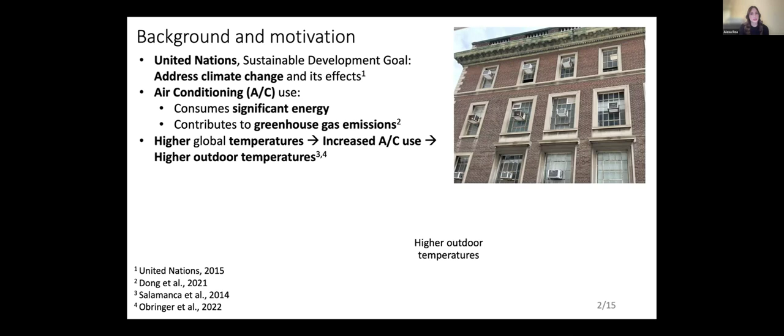One of the United Nations Sustainable Development Goals is to address climate change and its effects. Specifically, air conditioning use consumes significant energy while contributing to greenhouse gas emissions due to widely used refrigerants. In a vicious cycle, higher global temperatures lead to an increase in AC use, which in turn heats the outdoors, further necessitating AC use. Therefore, the growing environmental harms associated with increased AC use motivated us to explore how to decrease its use.

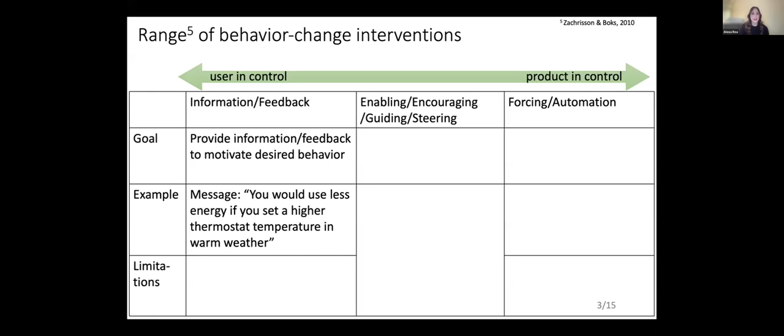Next, I'll give a background on the range of behavior change interventions. At one end of the range, user in control, we have information and feedback-based interventions. And the goal of these types of interventions is to provide information and feedback to motivate a desired behavior. And an example of this type of intervention would be a thermostat with the message displaying, you would use less energy if you set a higher thermostat temperature in warm weather. However, one of the limitations of these types of interventions is that it requires a high level of user motivation and assumes that humans are rational agents who are capable of changing their beliefs and behavior in light of new information and feedback.

At the other end of the range, we have product in control, so forcing and automation-based interventions. And the goal of these types of interventions is to make it impossible to avoid the desired behavior. So an example of these types of interventions would be setting a hard limit on the lowest possible thermostat temperature. And one of the limitations of these types of interventions is that it overrides user control. So it's making a decision on behalf of the user, and the user is not actually engaging in any meaningful behavior change.

In the middle of the range, we have enabling, encouraging, guiding, and steering interventions. And the goal of these types of interventions is to alter external factors such as the physical environment or product characteristics to motivate a desired behavior. And it was the goal of the current work to examine the effect of these types of interventions on users' thermostat temperature selections.

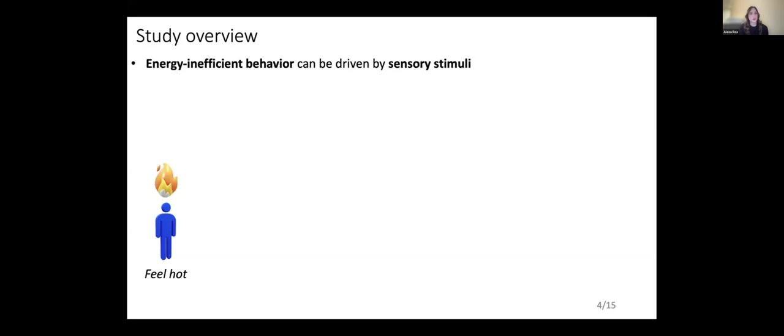Next, I'll give an overview of the study. Energy inefficient behavior can be driven by sensory stimuli. So for example, a user who feels hot entering a warm thermal environment may set an energy inefficient temperature adjustment. So we wanted to explore whether product features could create sensory stimuli that would then affect the temperature adjustment behaviors.

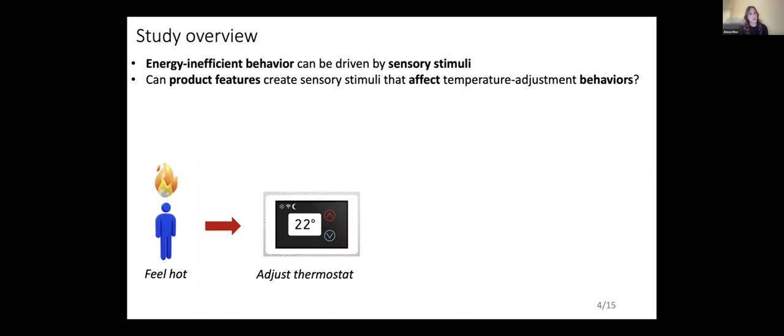Specifically, we wanted to examine how the addition of mechanical fans, which of course use less energy than AC, could increase eco behaviors. And it's important to note that the features should consume less energy than the energy the intervention intends to conserve. So we hypothesized that by alleviating thermal discomfort through the addition of mechanical fans, we could prompt more energy efficient temperature adjustments during user thermostat interaction.

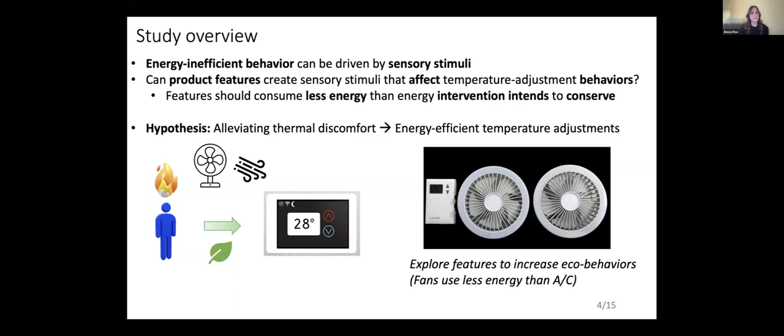So our study combined two effects. The first was fan feel, so whether participants could feel the fan or not, and fan visibility, high versus low. And we had 4 combinations of these effects. So the first was feel fan high visibility. So here in this first condition, the fans were on and were in front of a clear cover.

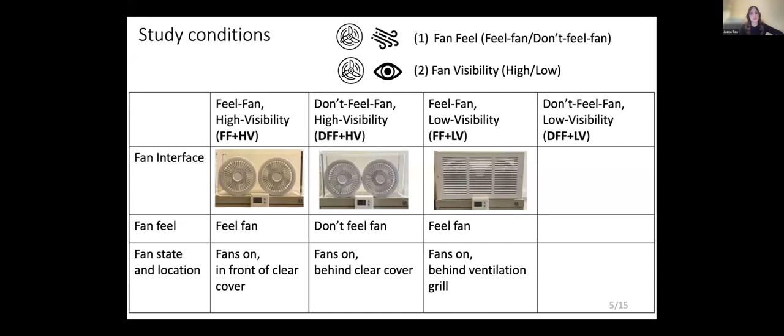Next, don't feel fan high visibility. Here the fans were on, but were behind or encased within the clear cover. Third, feel fan low visibility. Here the fans were on, but were behind a ventilation grill. And finally, don't feel fan low visibility. Here the fans were off and were behind a ventilation grill.

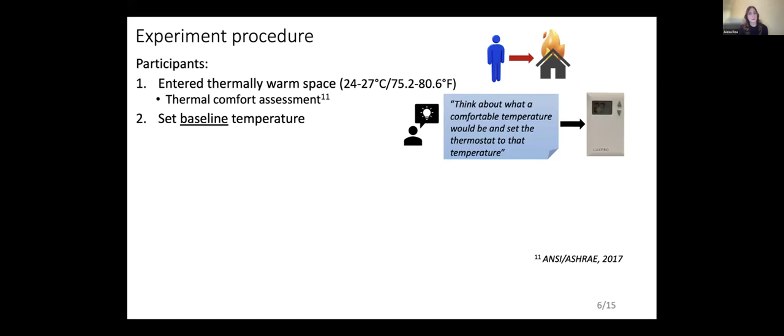Next, I'll go through the experimental procedure. So first, participants entered a thermally warm space, and this fluctuated between 24 and 27 degrees Celsius or 75 to 80 degrees Fahrenheit. They then completed their thermal comfort assessment, and this was based on the ASHRAE 7-point scale of thermal sensation. They then set their baseline temperature. So we asked participants to think about what a comfortable temperature would be and to set the thermostat to that temperature. They then made that temperature adjustment on an actual thermostat.

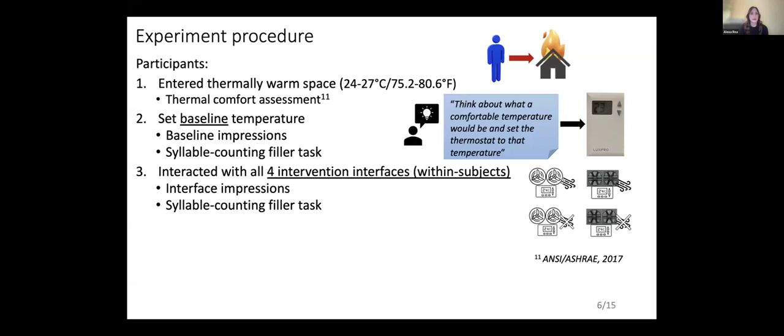After that, they completed their baseline impressions, followed by a syllable counting filler task to reduce carryover effects between conditions. They then interacted with all 4 intervention interfaces. Since this was a within subjects design, participants interacted with all 4 interfaces. They then completed their interface impressions and finally a syllable counting filler task.

Finally, participants answered post-interaction questions such as environment and thermal comfort assessment, manipulation checks, effect perception, and general, as well as more specific study feedback. And finally, value orientations, as well as energy myths to gauge participants' conceptual model of heat delivery.

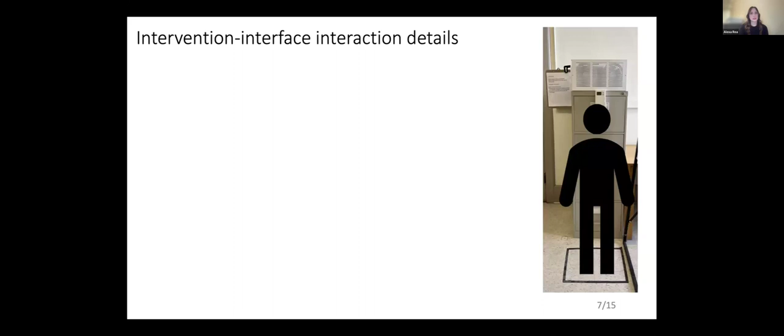Getting into the intervention interface interaction details. So this is what it looked like in our laboratory setting. And we had participants complete 5 tasks. So task 1, we asked them to take 30 seconds to think about their thermal comfort in this moment and to write down how they were thermally feeling as they stood in the rectangle. And this task was devised to just collect more qualitative information about how participants were feeling as they were face-to-face with the interface.

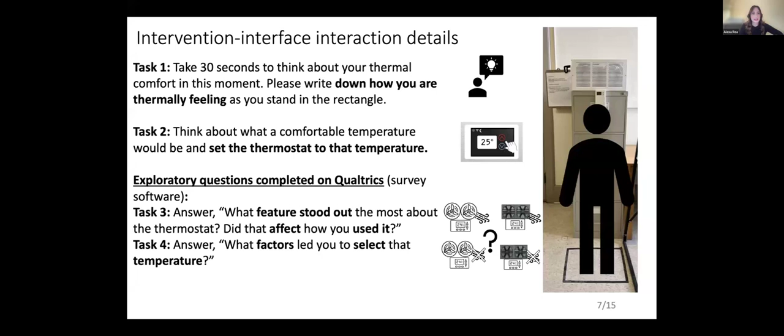Task 2, we asked them to think about what a comfortable temperature would be and to set the thermostat to that temperature. A research assistant then collected that temperature. And tasks 3 to 5 were more exploratory, and these questions were completed on Qualtrics. So task 3, we asked what features stood out the most about the thermostat and if that affected how they used it. Task 4, we asked them what factors led them to select that temperature. And finally, task 5, we asked them why they set the thermostat to the setting that they did.

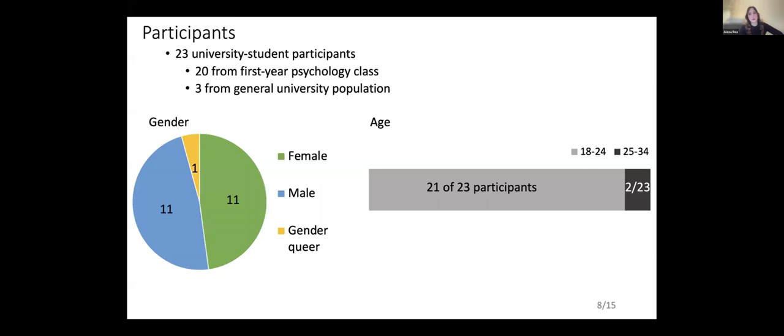Next, to give an overview of our participant characteristics. So our sample consisted of 23 university student participants. And to break that down further, 20 were from a first-year psychology class and 3 were from the general university population. For gender, it was evenly split between male and female students, and 1 student identified as genderqueer. Age, we had 21 of 23 participants within the 18 to 24 years of age range, and 2 of 23 within the 25 to 34 years of age range.

So first, examining our first result, we see that fan feel has the stronger effect. And first, examining temperature shift, which we used as a meaningful measure of behavioral change. And we define this as the difference in temperatures set by participants in their baseline condition as compared to the temperature set in each condition. And since temperature preference is so subjective and variable between people, we thought that it was important to essentially use participants as their own comparison point.

First, looking at the effect of fan feel. So we see a significant effect based on fan feel. Specifically, participants set higher temperatures when they could feel the fan than when they could not feel the fan as compared to baseline. Next, looking at fan visibility, here we do not see any significant effect. So whether fan visibility was high versus low did not affect participants' temperature adjustment behaviors. And finally, looking at the interaction, we do not see any significant relationship.

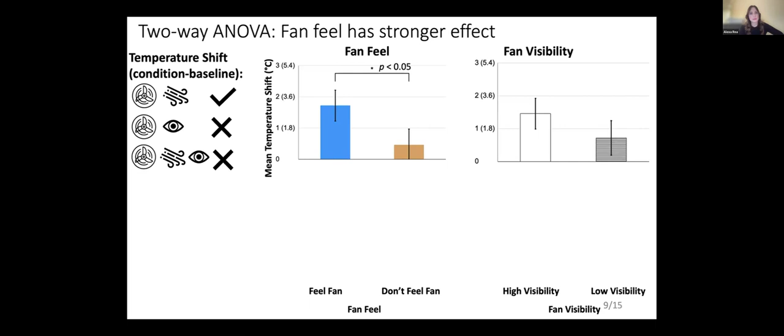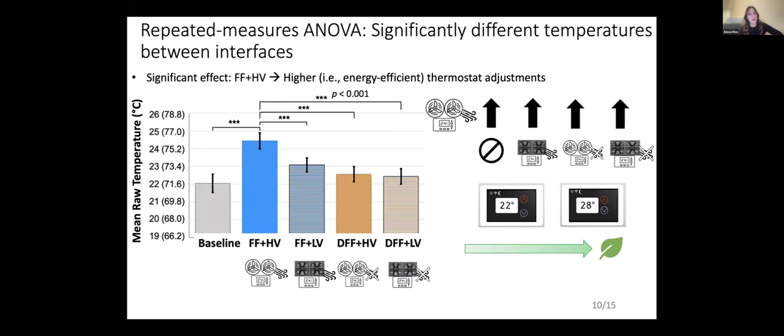Next, we see that significantly different temperatures were set between interfaces. Specifically, higher or more energy efficient thermostat adjustments were made by participants in the feel fan high visibility condition as compared to baseline and the 3 other intervention interfaces. So by setting higher temperatures, this leads to an increase in energy conservation.

So how do we interpret our results? So first, we see that fan feel effectively nudges energy efficient temperature adjustments. Specifically, higher temperatures were set when the fan was felt than when the fan was not felt.

And when examining open-ended responses, we see that 20 of 46 responses indicated some type of improved thermal comfort. And this is illustrated by this one participant who noted that they were not as concerned about warm ambient temperatures as before when not interacting with the feel fan interface.

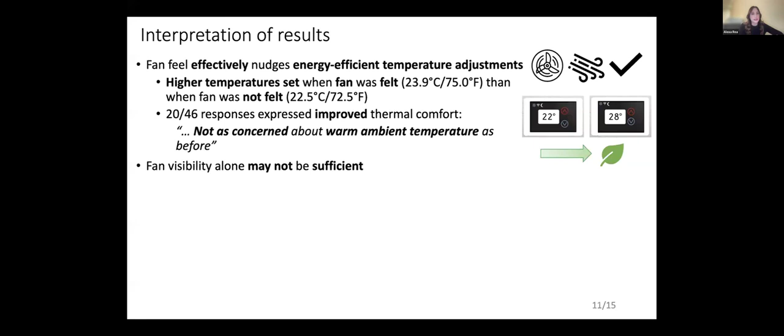Next, we see that fan visibility alone may not be sufficient, and that temperature adjustments were only marginally affected by fan visibility in the raw temperature analysis. A theme that emerged in the open-ended responses was this notion of visibility-induced frustration.

So for a minority of participants, they reported that being able to see the fan but not feel its effects led to some frustration, which in turn affected their behavior. And this is illustrated by this one participant who noted that the promise of a breeze locked behind the glass frustrated them, prompting them to select a lower temperature.

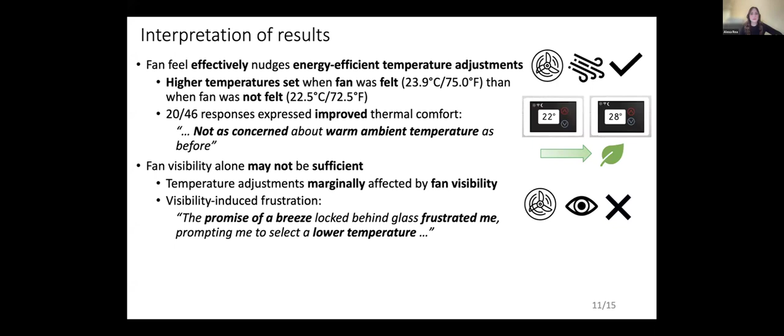Finally, we wanted to discuss some implementation possibilities for the current intervention. So as covered, the study examined the effect of fan feel and visibility on participants' temperature selection. However, as just noted, fan visibility may not be necessary in order to cue more energy efficient thermostat adjustments.

And since fan feel was shown to be the stronger effect, other configurations where participants can feel the fan may also be effective. And since we did want to ensure that fan feel and visibility were salient to participants, other fan locations and sizes are also possible. So for example, embedded within the thermostat would also be a possibility.

And finally, we just wanted to note that person sensing technologies such as motion sensors or weight detection can save additional energy to ensure that the fans only remain on during user thermostat interaction.

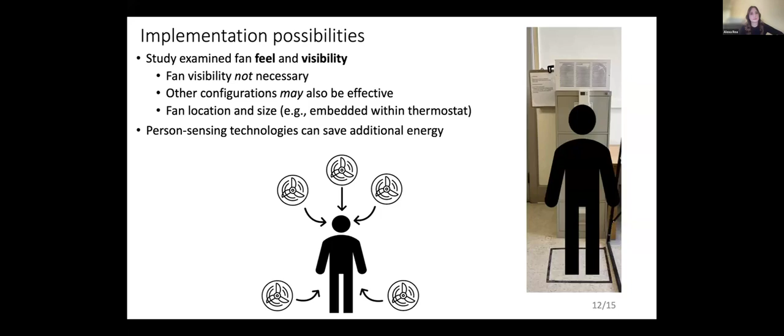And finally, future work should address differences in fan speed. So for example, in the feel fan high visibility and the feel fan low visibility condition, we had the fans set to the exact same setting.

However, since the feel fan low visibility condition had the ventilation grill cover, it did obstruct some of the felt airspeed, which did lead to some differences. So future work should ensure that there's as little difference as possible in felt airspeed for these two conditions.

Next, temperature fluctuation. So as noted, the laboratory temperature fluctuated between 24 and 27 degrees Celsius or 75 to 80 degrees Fahrenheit. And while it could be argued that this simulates more naturalistic conditions, we should ensure that this factor is better controlled for in order to remove this as a potential effect.

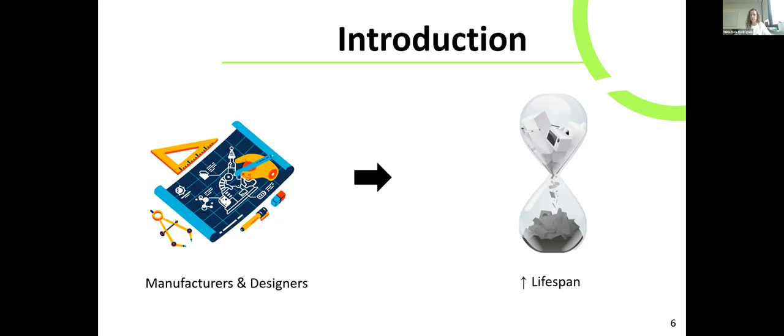During past years, numerous tools and new standards have been developed to assess the product's ability to be repaired, such as the French Reparability Index, which is already in use for 10 product categories, the Matrix for Ease of Repair, the eDiM, or the scoring system for the repair and upgrade of products, which was used as reference in the development of the EN 45554 standard.

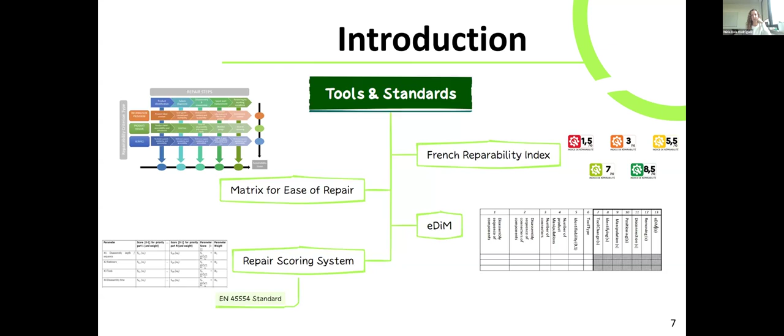The goal of this research was to define a design methodology and associated decision-making tool to derive and implement eco-design rules focused on disassembly and repair in the design of mechatronic products. Now we will focus on the method that we proposed, which aims to include the repairability indicators during the design phases for this kind of products. It is a systematic approach that can be performed iteratively to optimize the sustainability score of the analyzed product.

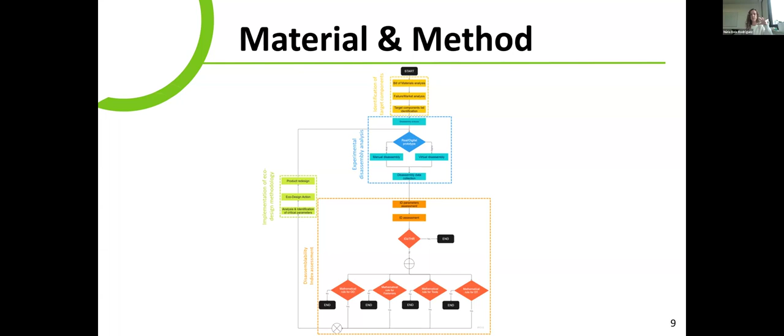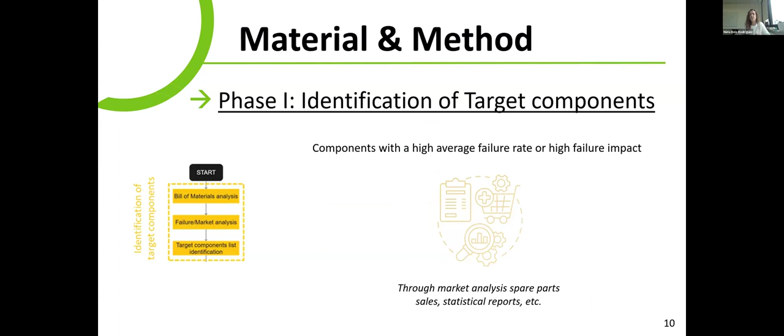It entails 4 main phases. The first one is the identification of target components, followed by the experimental disassembly analysis. Then the third phase is the disassemblability index assessment, and the last one is the eco-design methodology implementation. For the first phase, we need to define which parts or components of the product will be studied. These target components are those with higher failure rate or that are critical for the proper functionality of the product. The second phase is a key step for the repairability assessment. Here we need to disassemble the product manually or virtually in order to collect all the data to calculate the disassemblability index.

This research is based on the horizontal standard, so the information that we require includes the number of steps needed to remove the components, the type of fasteners that are present in the product, the type of tools, and the disassembly time. For the third phase, the assessment of reparability, there are several scoring systems, as I already explained, and most of them always identify the same disassembly criteria.

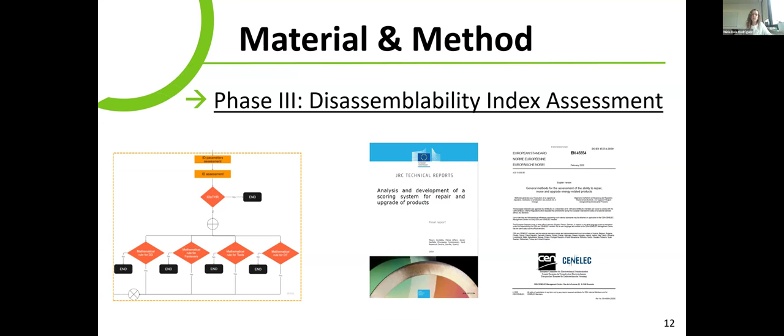And the decision to address just the disassemblability index rather than the overall RSS tool was motivated by our aim to address engineering eco-design solutions aimed at improving reparability from the designer's perspective. That is why we excluded parameters that were not strictly related to engineering design.

As we can see, if the disassembly depth for our priority part is equal or greater than the reference number, the score is 0. The scores range from 0 to 1, 1 being the best scenario possible. The most common approach to establish this reference value is to perform a benchmark analysis and retrieve this value as the maximum that we can find in this analysis.

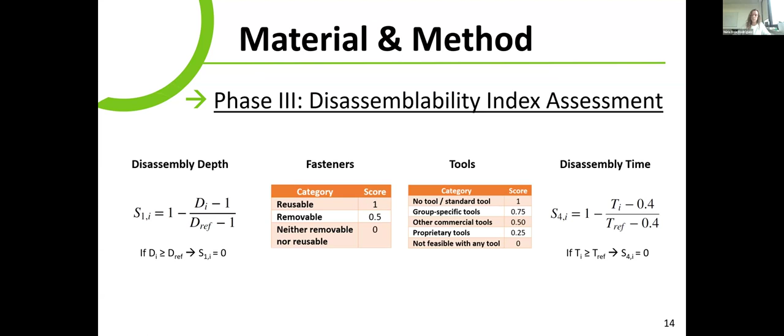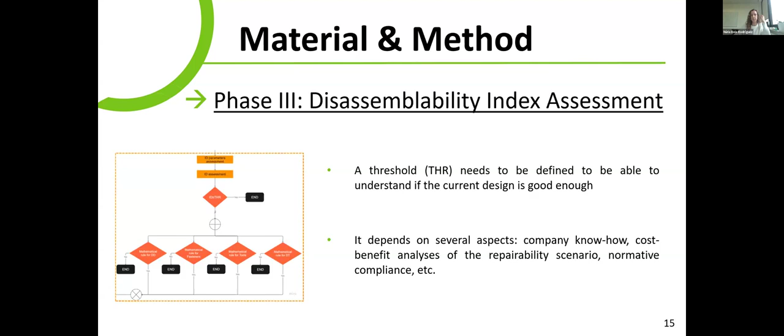To streamline the redesign process, we establish individual thresholds for each disassembly parameter that enable us to identify the main cause of criticality more effectively. Finally, the last phase is the eco-design methodology, and it involves implementing eco-design actions. And for this phase, we compare the results obtained with the thresholds that we already established. So these reference values were validated through a cost-benefit analysis and the ROC curve method.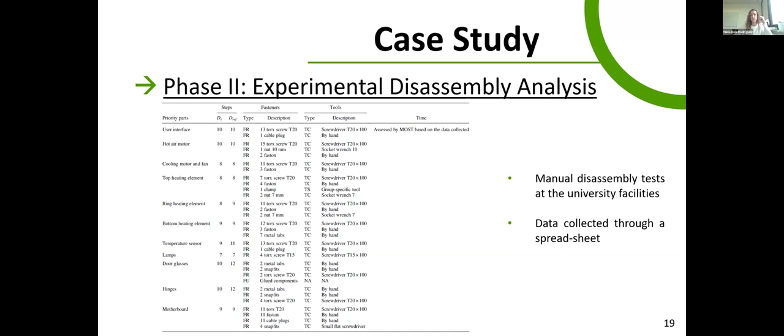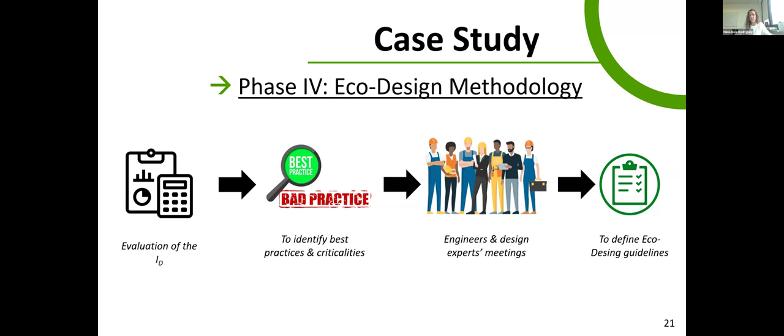For example, for the user interface, the main criticality is the fact that the number of steps that we need to remove it is the highest one in the market analysis. This is due to the vertical design that this component presents. And what we suggest to the designers is to allow the removal of the front panel where the user interface is placed without the need to disassemble additional components. For example, right now we need also to disassemble the back panel and the top panel. So we want to create a more horizontal design for this part.

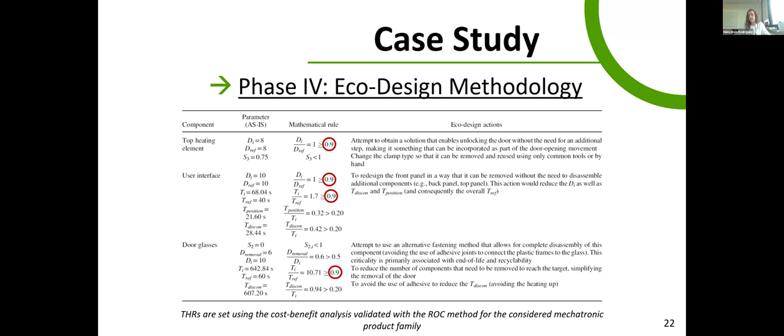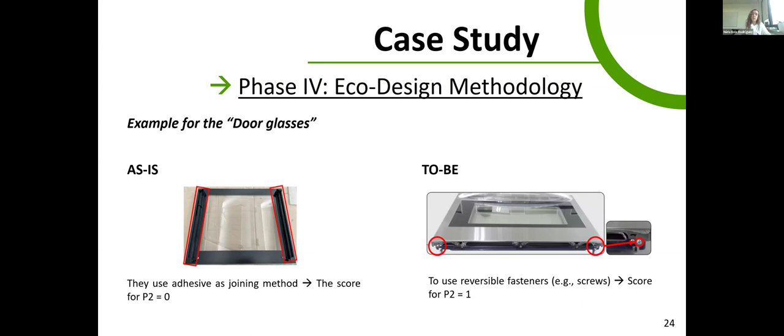Here, we will see more in detail some eco-design actions that we propose. For example, for the top heating element, one of the main criticalities was the tool needed to remove it. This clamp was considered a dedicated or specific tool, so the score was 0.75 out of 1. So we suggest to change this kind of clamp to one that can be removed using just a flat screwdriver, and the score goes to 1. Another example is the case of the door glasses. Here, the problem was the use of adhesive, and the proposed solution also involved the selection of reversible fasteners. Again, we are using screws. So once again, we can achieve the maximum score possible just changing this joining method.

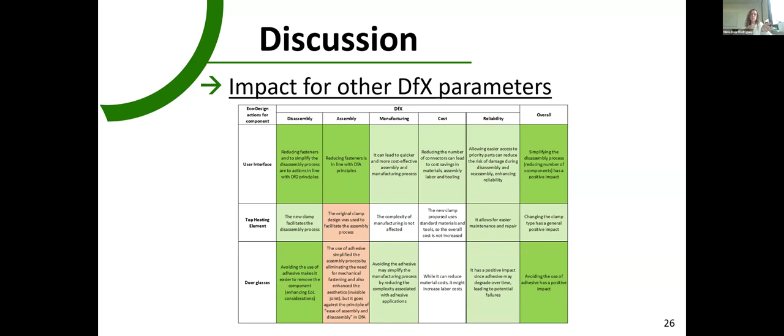For example, we can see how changing the clamp for the top heating, as we suggested before, has a negative impact during the assembly, since the original clamp was used to facilitate this aspect. But we can also see how the general impact for this action is positive, since thanks to that change, we improve not just the disassembly, but also the reliability by facilitating maintenance or repair.

So as explained before, there are different approaches to define weights for parameters or weights for target components. Initially, we assigned higher weights for disassembly depth, fasteners, and disassembly time, while for the tools, the weight was lower. The reason behind this is it was based on literature analysis for this product category. But then we performed a sensitivity analysis to observe the impacts of these changes on the outcomes. So we can see that reducing the weight of the disassembly depth increases the results by an average of 12%. While for the door glasses, it is just 1%, since here the main criticality was the connector, the adhesive, not the disassembly depth.

On the other hand, when the weight of the fasteners is reduced to 1, a general decrease in the index is observed, and this parameter was not critical for most components. However, as I said, the door glasses is the only priority part that increases the index result, by approximately 14%. Similar results to the ones from scenario 1 are observed when modifying the weights for tools or time parameters.

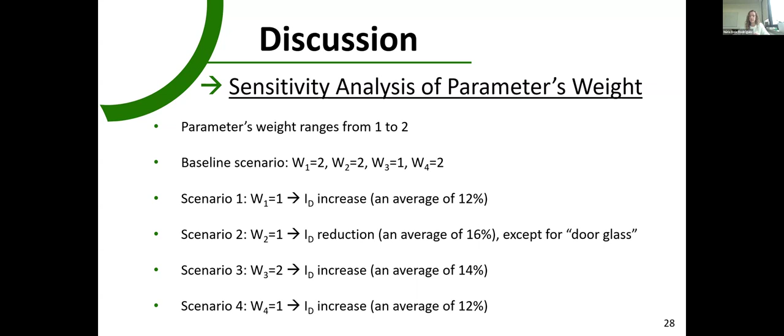So in conclusion, I would like to just remind that repairing plays a key part in achieving circular economy. This research introduces a methodology based on the disassemblability index that aims to improve repairability on mechatronic products. We tested the method with a case study in the field of household appliances, demonstrating that this framework is valuable for engineers, but also for designers. Using a virtual prototype, we were able to implement several eco-design actions and reassess the new disassemblability index, observing an average improvement of 31% after the implementation of all the actions proposed.

As future works, there should be a focus on incorporating additional parameters to conduct a more comprehensive assessment. Additionally, testing the method across other product categories would be also beneficial. And finally, conducting a more in-depth sensitivity analysis to assess the robustness of the index is necessary, and not to forget, to facilitate the adoption.

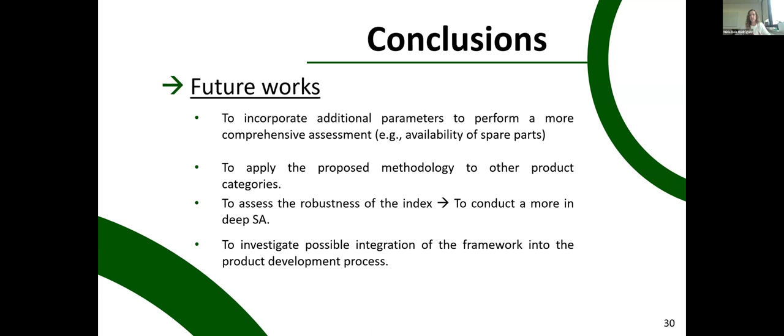At the end, what we will need is to put efforts trying to integrate this method into software programs to really help designers. So thank you very much for your attention.

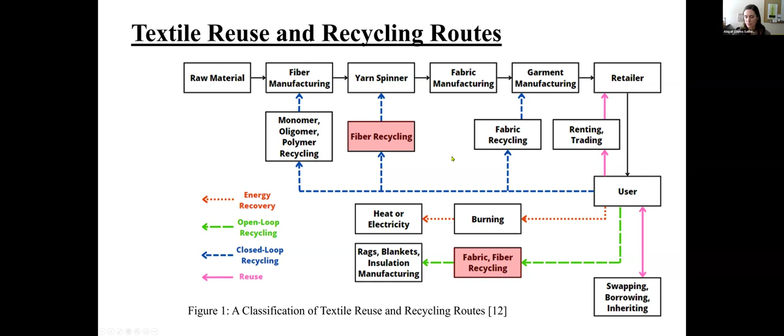What happens currently for these textiles? Here we have a great system view of what's going on at the end of life of textiles. We can have reuse. We can have open loop recycling back into new products from discarded apparel. There can be service economies in terms of renting, and also fabric or fiber recycling that happens within the original manufacturing process. The focus here is really fiber recycling and how mechanical textile recycling can be a part of that and what effect that has on design.

I know all of you have probably heard of the 12 principles of green engineering, and these principles have been around for a while. They came from the 12 principles of green chemistry, and it was time to start thinking about what might be missing from these principles. One of the things that seems to be missing on some level is flexible design.

If you look at this idea of being robust or responsive to changing circumstances, or adaptability to change, that fits really well with some of the ideas in the principles of green engineering in terms of meeting the need as it exists instead of having excess capacity. It's not the same, but it's similar in response. So we identified flexible design principles that only existed in these flexible design concepts with italics, and then the principles of sustainability that didn't necessarily exist in these flexible design ideas.

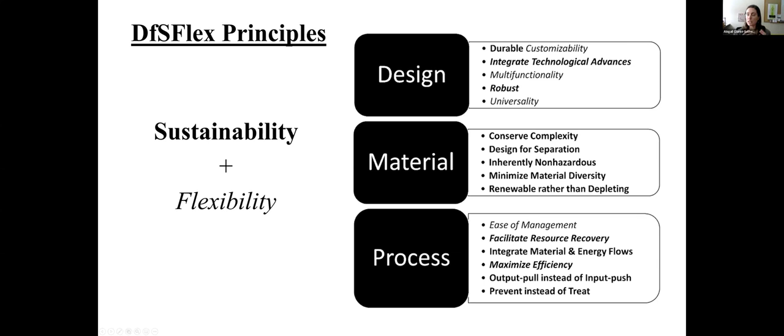And those 3 areas we considered were the design of the system, the material of the system or product, and then the process that the product did through function or the process that it was involved in producing. So this new set, or I guess recombined set of principles, reorganized, is what we chose to take a look at mechanical textile recycling.

So I wanted to talk a little bit more about what we mean by mechanical textile recycling, and provide the expectations that we had for it. What we're looking for from mechanical textile recycling is really high quality fiber output, high enough quality that it could be reused in the original product that was made. A lot of discarded textiles in the US are discarded apparel, and so it needs to have long enough fibers and quality fibers that could be used for apparel again.

The other thing is really decreasing this process loss that happens, and that process loss is really just dust. The output that you get from mechanical recycling tends to be textile pieces, which would require more recycling or processing to be reused, yarns and fibers. Yarns and fibers have reuse applications, the textile pieces don't, as well as there will be dust, and so reducing the amount of waste through dust is desired.

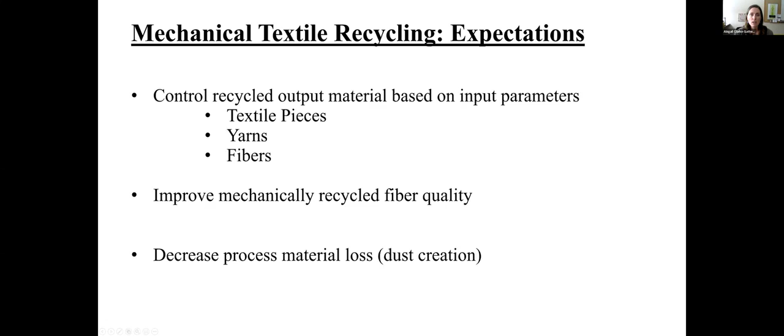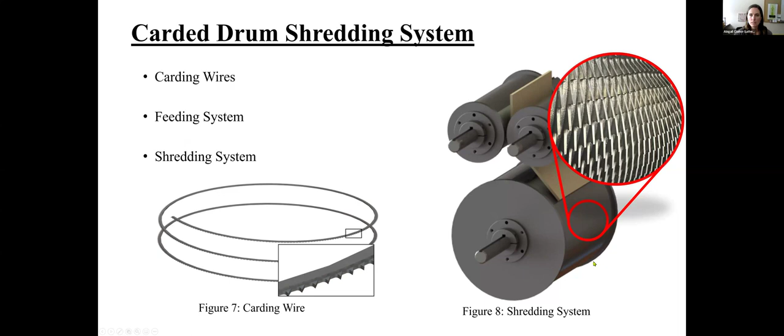That led to a variety of design changes, including changing the way that we connected the motors to the systems. What happened is that we ended up getting clogging when we did the feeding process with our second design. We got clogging between the drums and the wall, and we created a barrier to keep the fibers circling between the drums, and the fiber would spill over them, and we didn't quite have enough torque to control both the feeding drums and the shredding drums.

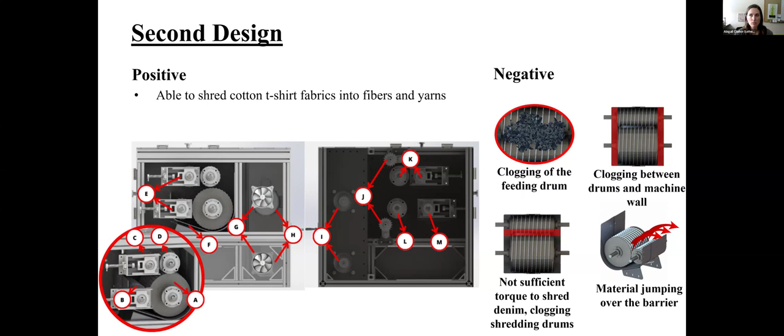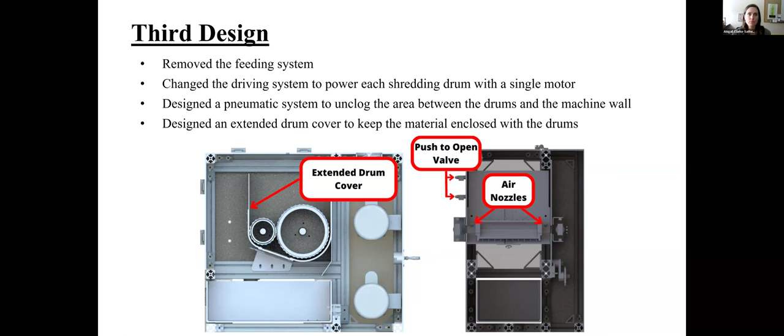That led us to our third design. We extended a drum cover. We removed the feeding drums. We used the motors just to power the shredding drums, and then added air nozzles to funnel material that fell away from the shredding carding cloth surface. So this final design is what we ended up evaluating. And in order to evaluate it, we not only looked at the design principles, but we looked at how it performed relative to our expected outputs.

So we varied several processing parameters, including different speeds. So this is representing speeds of the largest drum here in terms of RPMs, rotations per minute, and then different processing times. And again, we have different processing times between 30 seconds and 90 seconds. And as you can see, here we're looking again at outputs of textile pieces and then fibers and yarns together.

So what you can see is that as we increased the speed of the drum, we noticed a slight increase in dust. That's kind of the dark band at the top, but a significant decrease in textile pieces. And here we've got a statistical comparison of the percentage of dust, yarns and fibers, and textile pieces across all the pairs. It was non-parametric, so we're using the Kruskal-Wallis test and then the Tukey-Kramer all pairs comparison post-hoc test. That's the circles that you're seeing here.

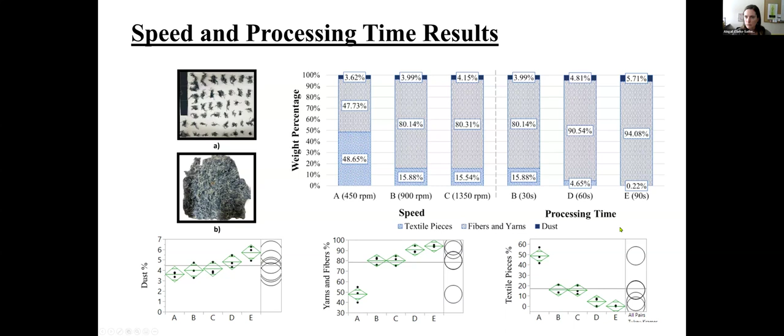So thinking about the design of the fiber shredder and how it related to the DfSFlex principles, three researchers, including myself, who had intimate knowledge of how the fiber shredder worked and was designed and had used it, evaluated separately for each DfSFlex principle. And we ended up evaluating both the design of the fiber shredder and then the process itself. So the physical architecture, the components, as well as how the process was performing for the desired output.

There we also have a description of how we rated these, both for design and for process. In terms of both the fiber shredder design itself and the process, there wasn't total agreement among all of us on many items. There were a couple of places where, amongst the three raters, there was agreement about really meeting those principles. So in terms of material design for separation, the design was met and assumed to be met by all of us.

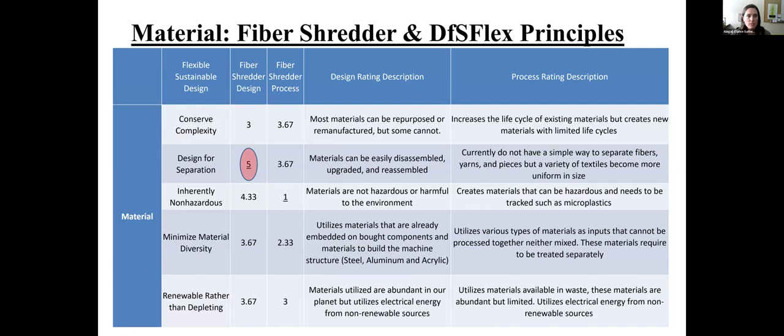There also was agreement on the negative side about the process. The underlines show where we all agreed that material that could be hazardous might be created, especially in terms of microplastics for polymer-based materials. So that was a concern that was identified through this. And then in terms of the process, all raters agreed that facilitating resource recovery was embodied by the process in terms of repurposing and recycling these textiles successfully.

Finally, we all agreed that in terms of the process, in terms of integrating material and energy flows, it relies on non-renewable sources of energy. And that, again, is another place where we could look at the process in order to improve it. So this is a shortened discussion of all of this, but in conclusion, we're still designing and still working on improving both the design and process. And this approach helped us think of ways to focus those efforts. And we'd like to thank the National Science Foundation and Minnesota Sea Grant for funding this research.

Fantastic. Thank you so much. I know we have a couple of good questions in the chat for later, but we'll move on

to our fourth talk from Kamyar Raoufi from Oregon State University. To introduce Kamyar, I'd like to say a few words. He's a postdoctoral scholar in the School of Mechanical, Industrial, and Manufacturing Engineering at Oregon State University and works with his co-author on this paper, Dr. Karl Haapala. He worked on research during his PhD funded by the National Science Foundation and collaborated with students and researchers from many different universities, including Iowa State University, Pennsylvania State University, and Wayne State University. Kamyar also participated in an NSF supplement project at a consultancy company, EarthShift Global in Maine.

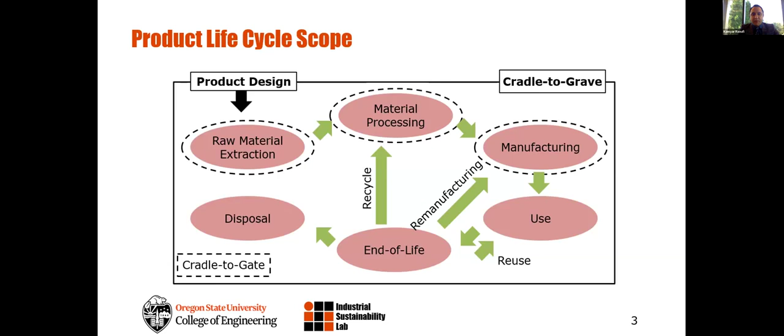However, this kind of assessment for non-experts, who I define in this research as decision makers who do not possess specialized knowledge in sustainability analysis of product designs and manufacturing processes, is going to be challenging based on the multidisciplinary nature of sustainability and such assessment. So one enabler to address this issue is engineering education. Educators have developed several methodologies and have applied ad hoc approaches to conduct sustainability impact assessment.

The objective of this research was to facilitate simultaneous analysis of sustainability performance impacts of different manufacturing processes and systems through unit manufacturing process modeling, or UMP modeling, within an easy-to-use, publicly available product design and manufacturing analysis tool.

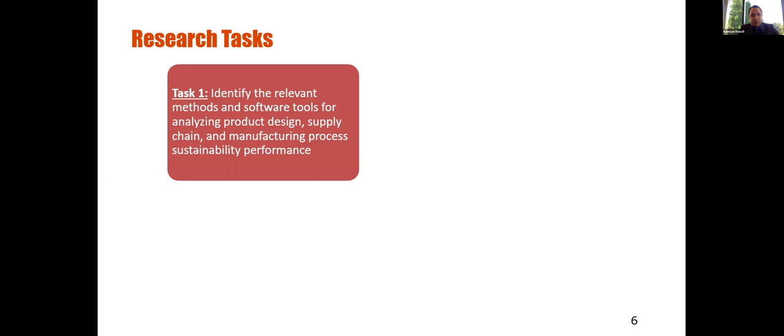The research tasks to achieve this objective were, first, identifying the relevant methods and software tools for analyzing product design, supply chain, and manufacturing process sustainability performance, to identify the gaps and the advantages or drawbacks of each of these tools and methods. Second, to establish a framework that integrates product design and supply chain information within a mechanistic UMP modeling approach for quantifying manufacturing sustainability performance.

Third, to develop a publicly available product design and manufacturing analysis tool for non-experts to conduct manufacturing process and system analysis under the lens of sustainability performance. And finally, to evaluate the operational performance of the tool in terms of ease of use and usefulness metrics.

While this research also contributes to engineering education, the main focus of this presentation and this paper is the technical aspects of this proof-of-concept tool and this framework. I'm not going to talk about task 4, which focused on the operational performance of the manufacturing process and system sustainability analysis. I'm going to focus on the 3 main tasks for this presentation.

So research task 1 focused on methods and software tools to identify the gaps in the literature. Existing sustainability assessment software tools and methods have some limitations. First, eco-design software tools often require costly licensing and are not easy to access. This is one of the main challenges for non-expert decision makers to get access to these tools for conducting sustainability assessment. Second, we need domain expertise to produce meaningful results.

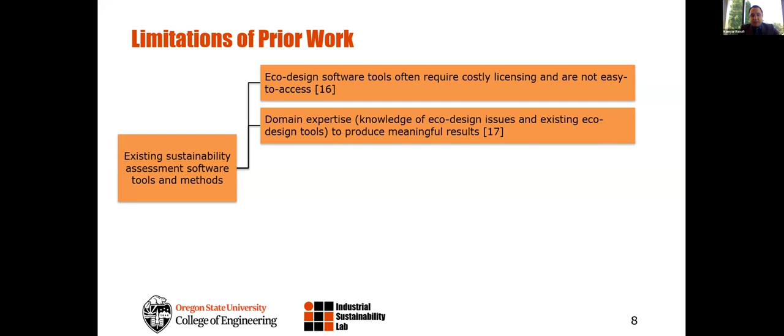By domain expertise, I mean knowledge of eco-design issues and existing eco-design tools, the concept of life cycle assessment, the life cycle inventory, how we need to capture the data, and all topics related to life cycle impact assessment. Third, LCA tools that perform manufacturing analysis rely on product mass. So if you have 2 different products with different features or geometries but the same mass, since these tools mainly focus on the mass of the product, they will have the same impact assessment.

Also, methods and software tools capable of conducting quantitative sustainability assessment during the product design phase, which focus not only on 1 or 2 aspects of sustainability but on all the aspects, and also software tools that are simple and user-friendly are needed. In addition to having domain expertise, software tools themselves need to be simple and user-friendly.

Thus, in research task 2, I focused on developing a framework for non-expert decision makers, and by framework I mean some sort of educational framework for these non-experts to be able to conduct sustainability impact assessment during the design phase. And here, the life cycle stage, as I described earlier, was focused on the cradle to gate life cycle scope, and the process characterization is based on UMP modeling, and all 3 aspects of sustainability are considered.

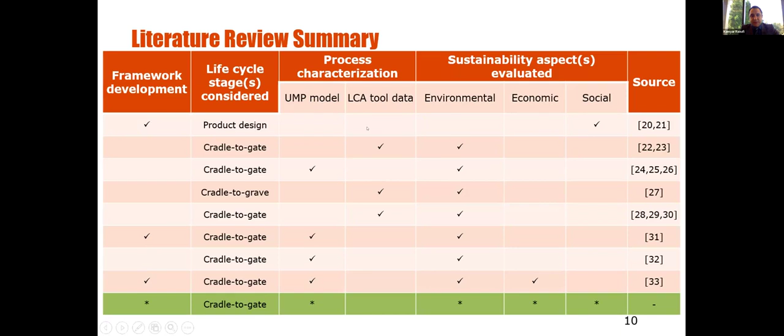So here is the framework that I developed. The first phase of this framework focuses on product development, which includes 6 activities and 6 steps, starting from defining the product idea up to generating the detailed design. The second phase is supply chain configuration, which starts from selecting the raw material suppliers, selecting from-to locations, selecting transportation modes and routes, and developing the mathematical models for conducting the sustainability assessment for the supply chain activities and these logistics: the transportation and different upstream energy consumption and carbon footprints.

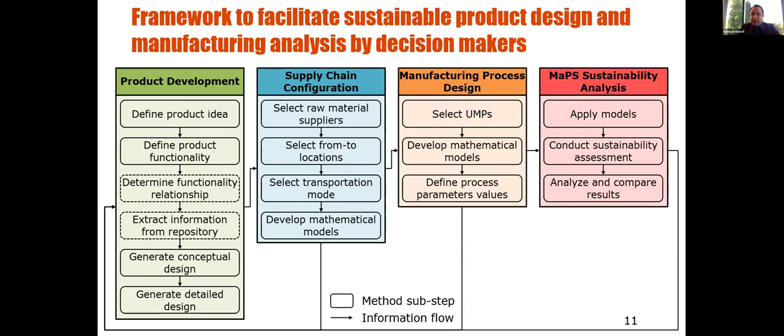The third phase is manufacturing process design, which starts with selecting the required unit manufacturing processes, or UMPs, for making the intended product, developing the mathematical models for each of those UMPs, and then defining the process parameter values for conducting the assessment itself. And finally, we have the MAPS sustainability analysis, and MAPS stands for manufacturing process and system, which is applying the models developed in the previous phases for the supply chain configuration and manufacturing process design, conducting the sustainability assessment, and analyzing and comparing the results.

So in task 3, which was developing a proof of concept, here is what I focused on. In terms of the ease of use of the method, based on the accessibility of the tool, I focused on providing it publicly available and online. And also I developed a repository for that. Input of data information is based on the user entry of data. Manufacturing information is obtained by the UMP modelings, and the main objective of the analysis was on the evaluation, not on optimizing the product design.

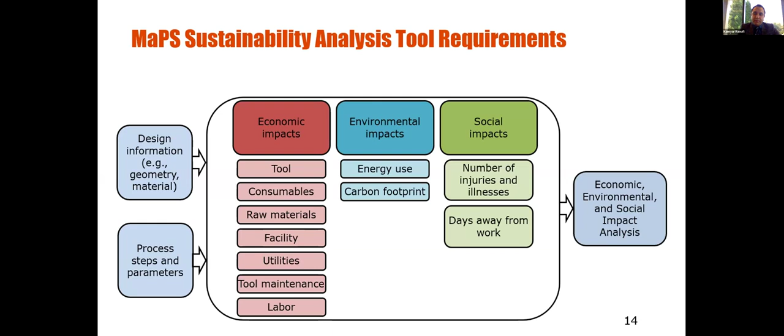And here are the elements that exist in the MAPS sustainability analysis tool. You can see that the design information based on the geometry or material, as well as the process steps and parameters, are captured to quantify the economic, environmental, and social impacts. For the economic aspect, I have 7 cost categories, which are tool, consumables, raw materials, facility, utilities, tool maintenance, and labor. For the environmental impact assessment, I focus on energy consumption and carbon footprint. And for the social impacts, I focus on number of injuries and illnesses and days away from work, for which I developed 4 indicators and 4 metrics for quantifying the social aspect. And finally, we will have the economic, environmental, and social impact assessment.

And here is the mechanism of the proof of concept. You can see that for each of the phases of the framework, the user can interact with the module specified in the proof of concept. And by providing the information, the tool is going to do all of the math and calculations, applying all of those models. Because in the framework, we had some activities and steps in terms of developing mathematical models. These are the sections that we are not expecting the non-experts to conduct.

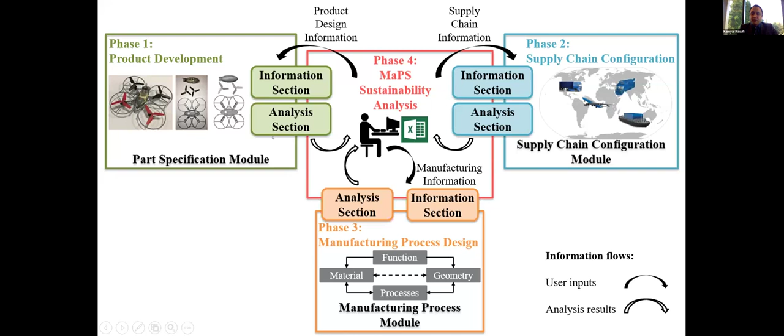This is the part that has been developed under this proof of concept for these non-experts to be able to conduct a sustainability assessment. Thus, they can easily select some numbers or values from the drop-down menus, for example, in each module, or provide some of the data and parameters for the product design to be able to conduct a sustainability assessment for all the 3 phases of the framework.

So here for phase 1, in terms of having a repository, I focused on developing a repository for drones and multi-copters, which was done by some of our high school interns that participated in our research lab in the summers of 2017, 2016 and 2015. The main responsibility was playing with these drones to capture their lifting power while the batteries were fully charged, then doing some disassembly, and then providing the CAD files of each of these components.

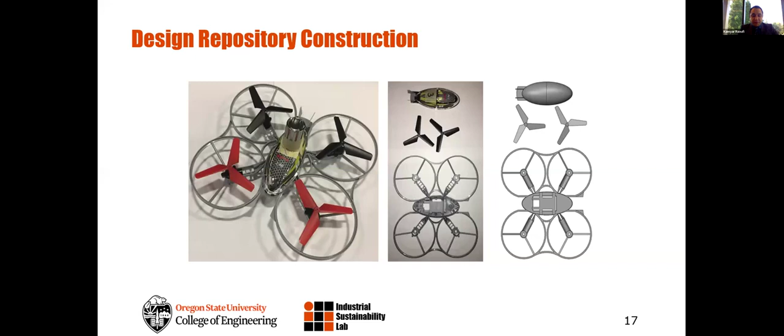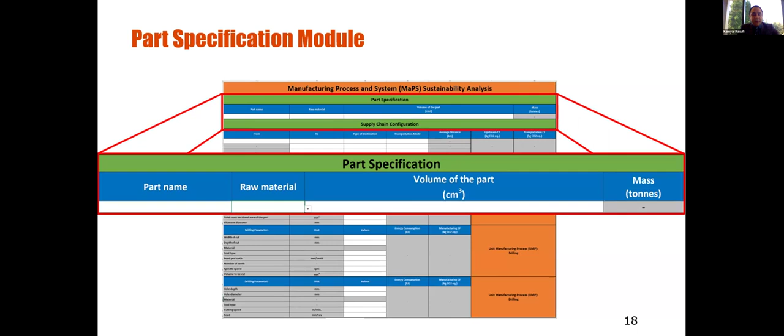And here is a screenshot of the part specification module. You can see that we have drop-down menus here for each of the raw materials. If it's based on the plastic raw material, or if it is metal, non-experts can select what type of material they are using.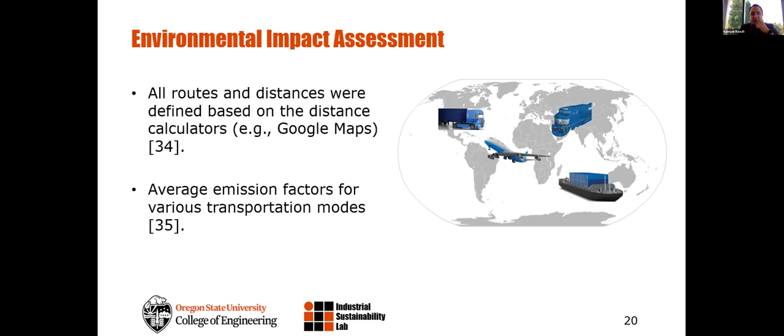For supply chain configuration, again, here we were developing the mathematical models. All the routes and distances were defined based on distance calculators, and average emission factors for various transportation modes were used here. And for social impact assessment, as I explained, I developed 4 indicators. The first one was number of injuries and illnesses for transportation activities, and days away from work for transportation activities as well.

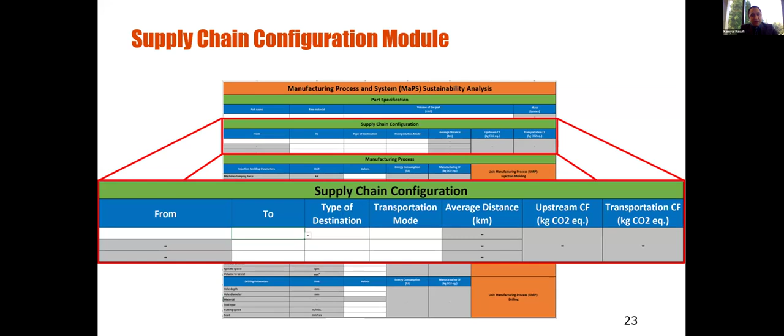And here again is the interface, a screenshot of the supply chain configuration module, which has from and to locations, the type of destination, if it's a connecting city or the manufacturing city, and the type of transportation mode. Then the average distances and the upstream carbon footprint will be calculated for the non-experts based on what they have selected in the previous steps.

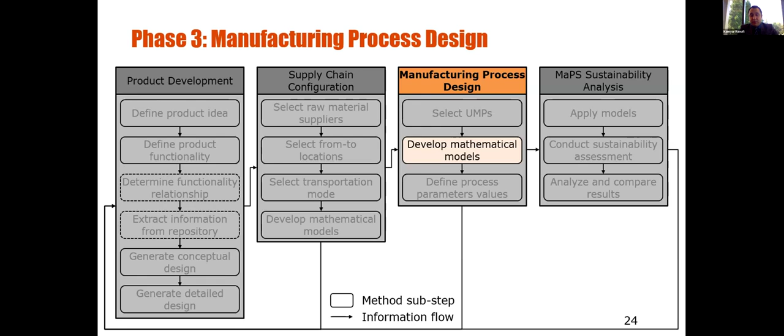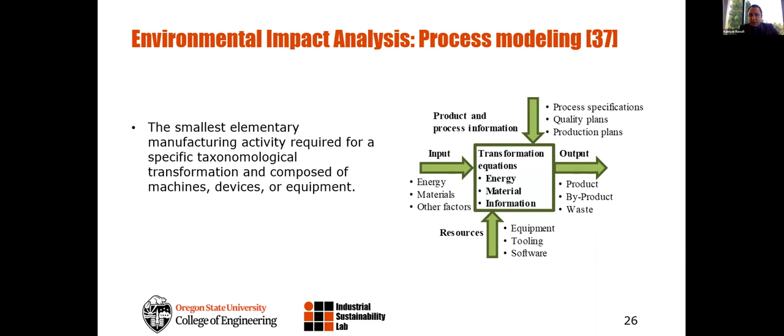And developing the mathematical models for manufacturing processes. Here we start with the manufacturing process design approach, which captures the functional requirements, process requirements, manufacturing process flow, manufacturing process step analysis, and then the cost categories. For the environmental impact assessment, I use process modeling and input-output modeling for capturing the environmental impact.

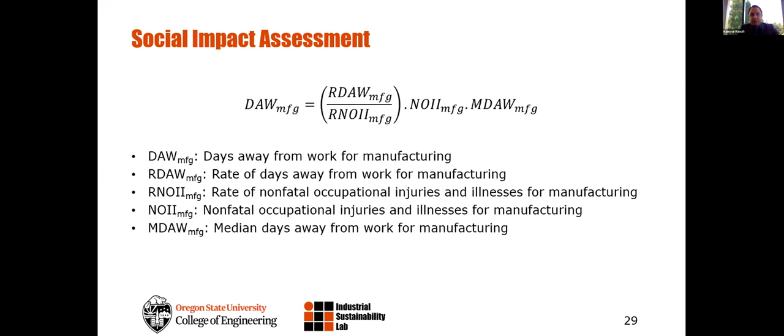Under this model, for the plastic part production in this proof of concept, I have 4 UMPs for the plastic parts and 5 manufacturing processes for metal parts. Under this research, I developed a mathematical model for the metal injection molding manufacturing process, which was also included in this proof of concept. And similar to the transportation activities, we have number of injuries and illnesses and days away from work for the manufacturing processes as well.

And so here I have 2 representatives. Sorry, Kamyar, 1 minute left.

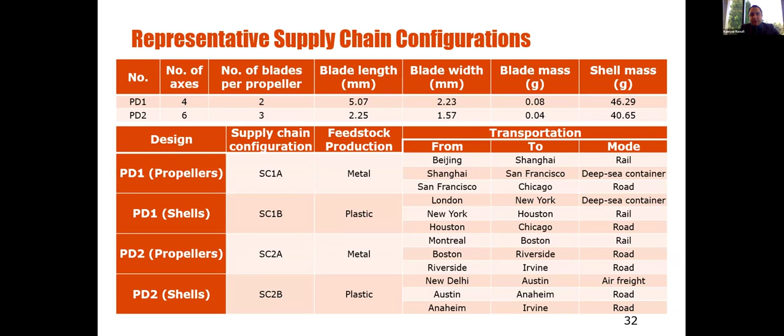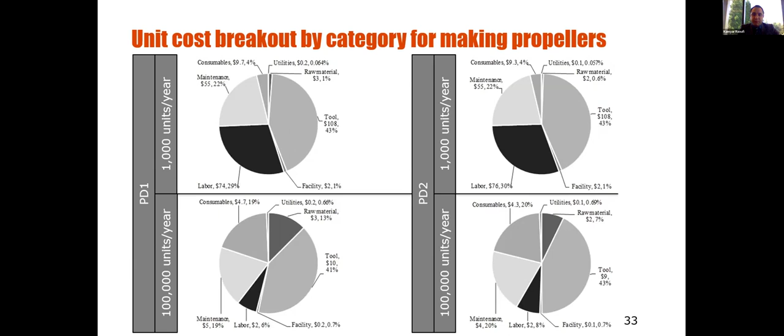Sure. Here are the representative supply chain configurations based on the product designs that I have, based on the number of propellers and blades and supply chains. And here are the pie charts that the proof of concept provides for the user. Here we have the unit cost breakout by category for making the propellers based on different annual production volumes. Same thing for the shells.

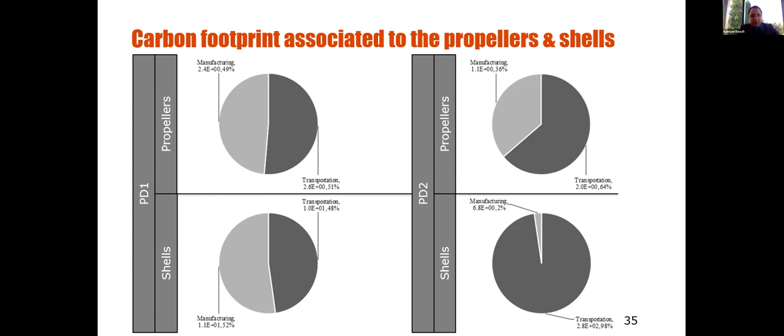At 1,000 units per year compared to 100,000 units per year, you can see what the main drivers of the cost are. The carbon footprint associated with the propellers and shells for both product designs, number of injuries and illnesses, and days away from work for each of the manufacturing processes and supply chain configurations.

And so the conclusions: the methods and tools to evaluate sustainability performance, as I explained, have some limitations for enabling non-experts to conduct a sustainability impact assessment. These were the required expertise, relating sustainability information to the product conceptual design, which is challenging for non-experts, and the costly licensing. They also rely mainly on the product mass and focus on 1 or 2 aspects of sustainability impact assessment rather than all 3 aspects.